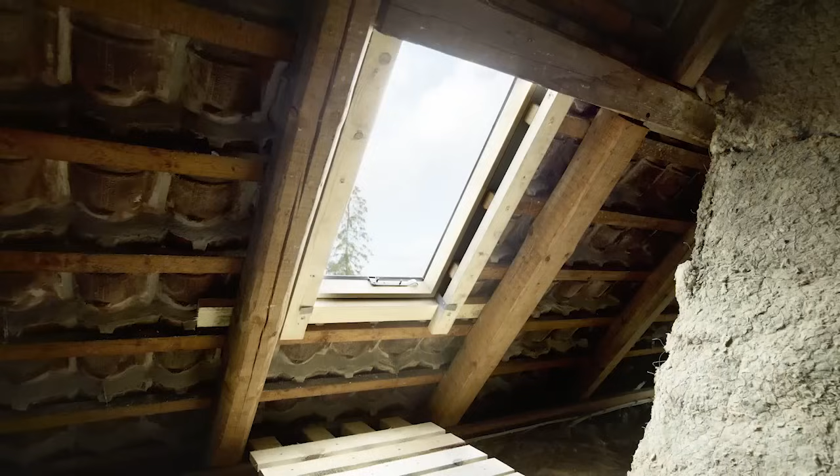You have a project where the space under the roof is not for living, but for storage or a technical room. You still want some daylight and the possibility to get fresh air inside, or convenient access to the roof. Or maybe it's a historical building renovation where a specific vision is required.

VELUX roof windows for cold rooms or uninhabited spaces are available as a separate folder in the VELUX ArchiCAD library. The name of the folder is Cold Room Windows.

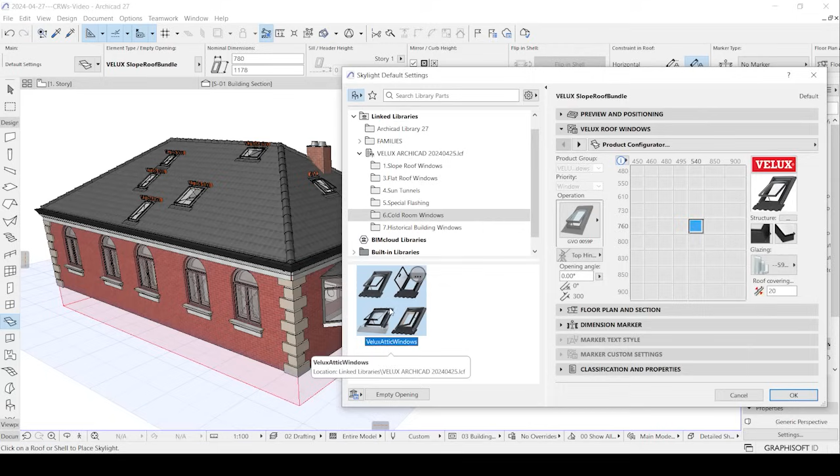We start with the GVO, set as the default product to start with. This is our classical roof window with a curved top, a modern alternative to a traditional cast iron roof window. It's made from maintenance-free polyurethane and aluminum, and comes complete with integrated flashing for easy installation and an integrated roller blind for heat protection.

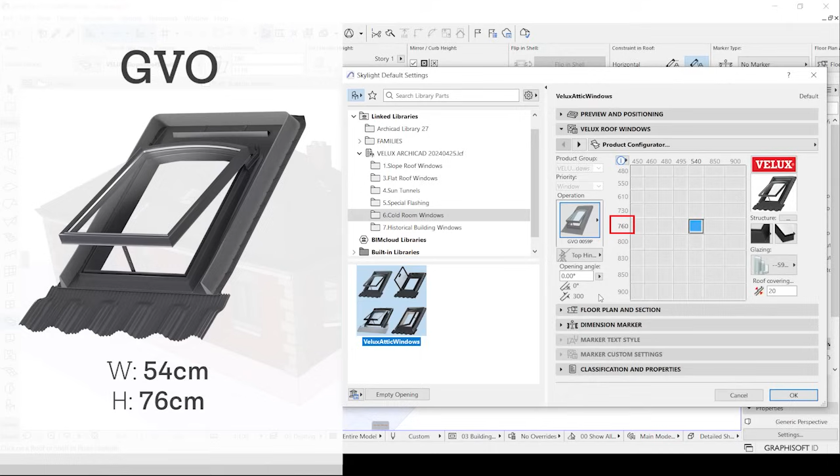The product size is 54 centimeters in width and 76 centimeters in height. The hinge is on top. Installation range is from 20 to 60 degrees.

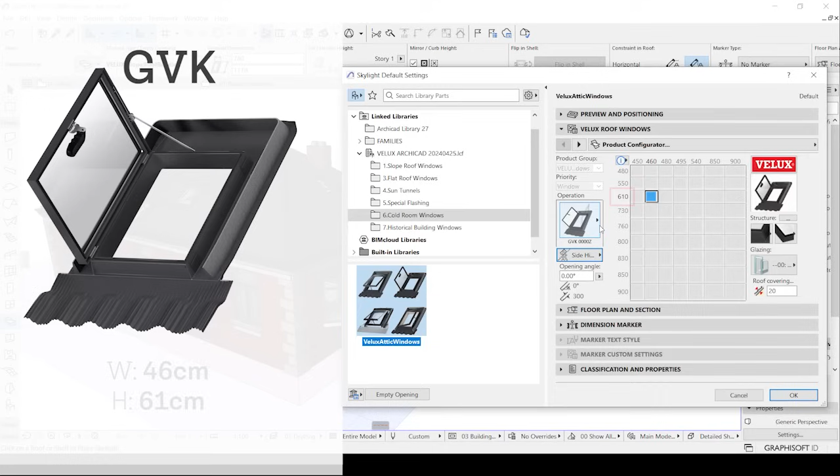Next in the list is the GVK, a side-hung window that opens to the left or right depending on preferred use. It's made from maintenance-free aluminum and polyurethane, and comes complete with integrated flashing and molded tread. The product is available in one size, 46 centimeters in width and 61 centimeters in height. Installation range is 20 to 65 degrees.

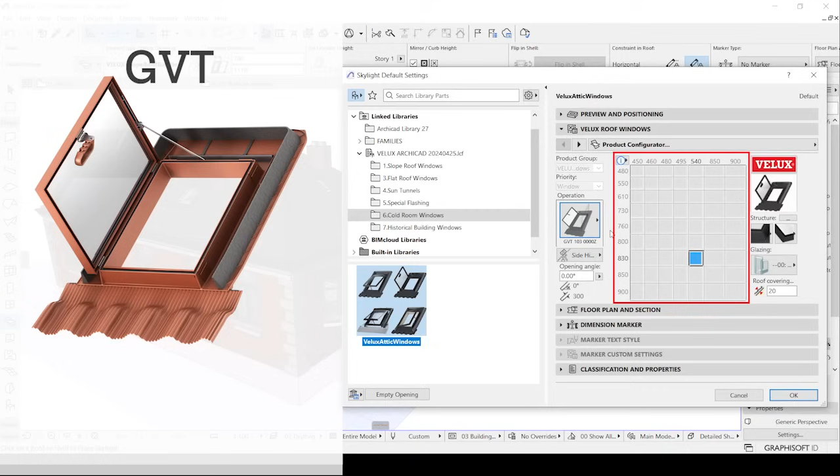GVT is a side-hung window that opens to the left or right depending on preferred use. It's made from maintenance-free aluminum and black or red polyurethane, and comes complete with integrated flashing and molded tread. Installation range for GVT products is 20 to 65 degrees. The product variations are available in one size, 54 centimeters in width and 83 centimeters in height.

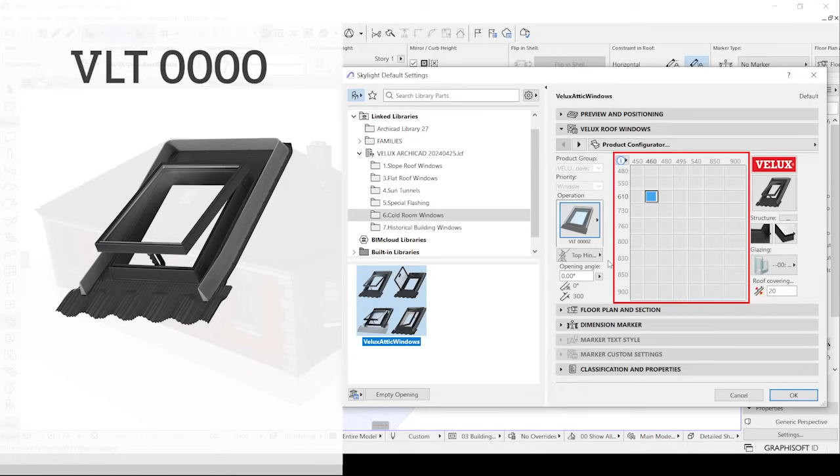VLT0000: this roof window is top-hung and has 3 ventilation positions. It's made from maintenance-free black polyurethane and aluminum, and comes complete with integrated flashing. The product is available in one size, 46 centimeters in width and 61 centimeters in height. The hinge is on top. Installation range is 15 to 60 degrees.

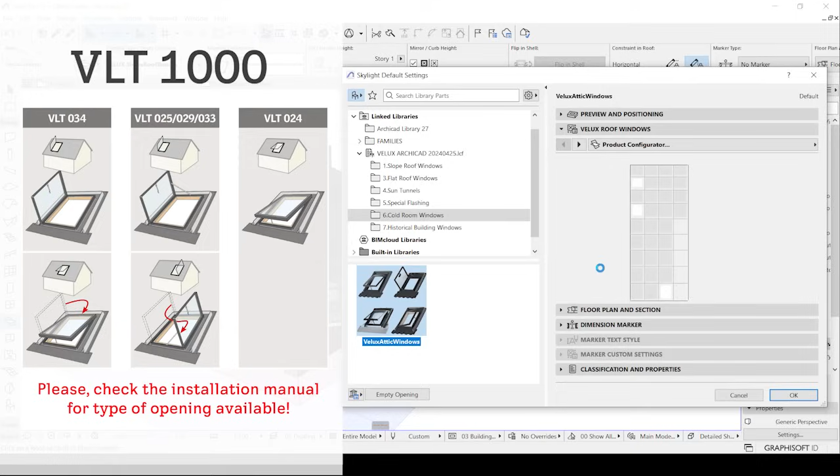VLT1000: this type of cold room window has the biggest variety in sizes and opening types. It can be mounted either side-hung or top-hung depending on the variant. Side-hung variants can open to the left or right depending on preferred use. It comes with a timber frame and integrated metal flashing, and is available in 5 sizes. Installation range varies with the type of opening and is between 20 and 60 degrees.

Presented last but first in the list is the GVR. It is a conservation roof window, top-hung and specially designed for preserved buildings. It has a better U-value than the rest of the cold room windows presented, but please consider its implementation in connection with the thermal requirements for your project.

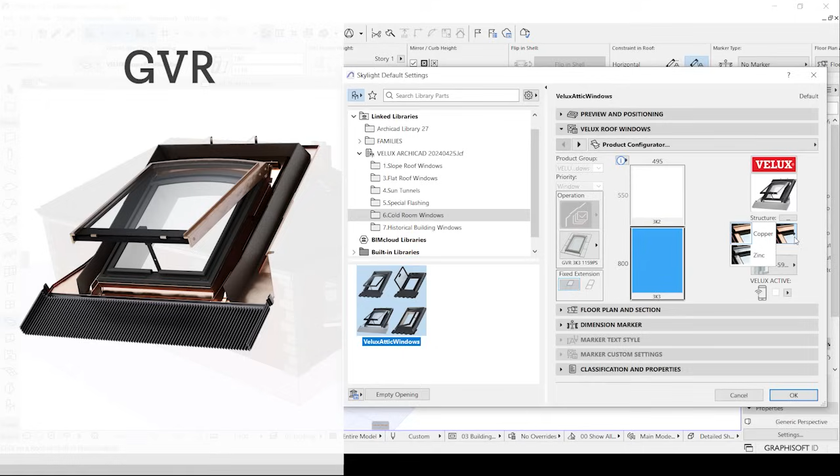It comes in 2 sizes: 50 centimeters in width and 55 in height, or 50 centimeters in width and 80 centimeters in height. The product is available with exterior frame and flashing parts in copper or zinc for perfect integration in traditional roofs. The window is operated by means of a peg stay in the bottom sash with 3 possible ventilation positions. Installation range is 30 to 55 degrees.

This was a short introduction to the VELUX Solutions portfolio for cold rooms.